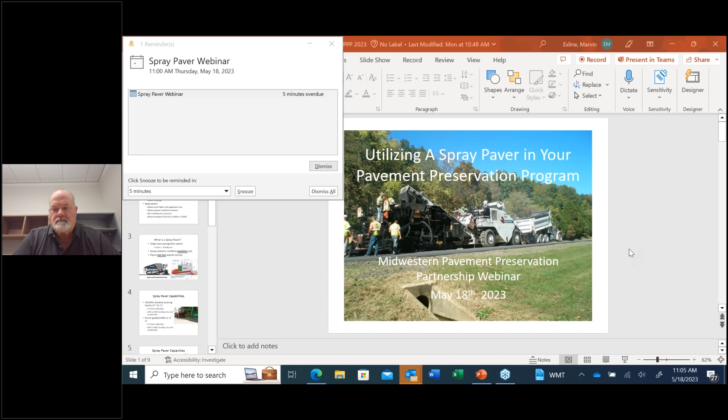Good morning, everyone. My name is Marvin Exline. I'm with the technical group for Asphalt Materials. In some of my previous companies, I dealt a lot with ultra-thin bonded wearing course going through spray pavers, and also with some dense graded hot mix going through spray pavers. So with that, I've got a few slides put together to give you a brief background on spray pavers.

The first question I thought would be of interest to everybody is, why do spray pavers exist in the first place? If you take a look at the traditional paving process using distributors for application of the tack coats, it really limits the rate of tack you can use because you're driving everything over the tack coat in the construction process. It also limits somewhat your tack selection, and it tends to favor harder base asphalt materials to reduce tracking issues, and it definitely does not favor polymer modified emulsions because of pickup and that type of thing.

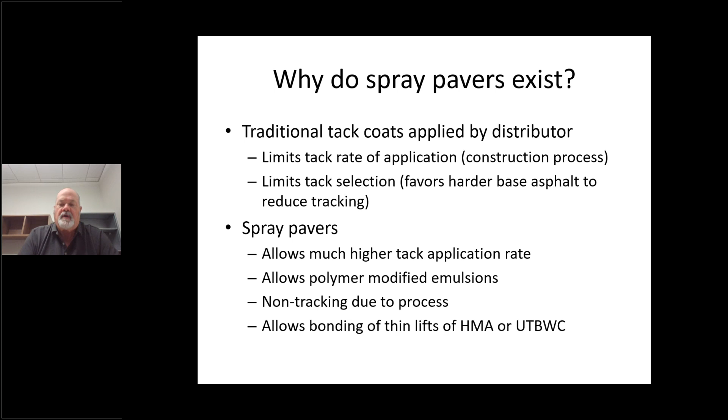The spray pavers, by contrast, allow these higher application rates of the tack. They will allow polymer modified emulsions. They're non-tracking due to the process, and they provide very good bonding for thin lifts of HMA or ultra-thin bonded wearing courses.

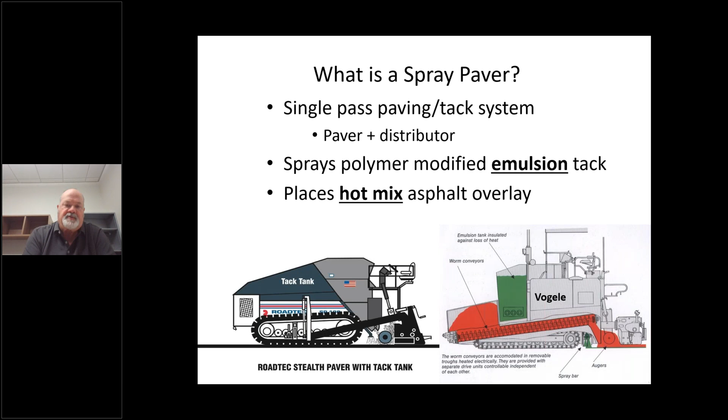So a little description here as far as what is a spray paver: basically a combination of a distributor and a paver in one machine. The equipment is able to spray the polymer modified emulsion immediately ahead of where the hot mix is being placed. In the diagrams below, you can see where the spray application is coming out, and within almost a few inches to a foot, you're seeing the hot mix being placed on top of it.

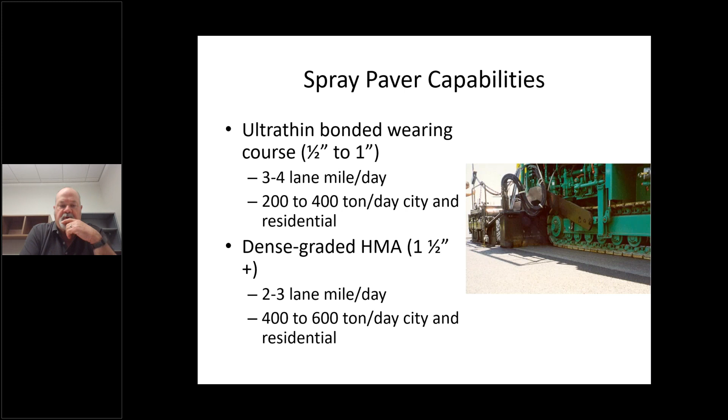The spray paver capabilities, like with ultra thin bonded wearing courses, which is typically less than an inch, you can typically pave 3 to 4 lane miles per day, and in city and residential, 200 to 400 tons per day. When you go to dense graded hot mix with thicker lifts, typically 1.5 inches plus, you can usually pave 2 to 3 miles per day and place 400 to 600 tons per day in city and residential applications. As far as capacities, I'll show 2 of the different spray pavers.

I believe there's at least one more in the marketplace now, but these are the ones I had info on. One is a RoadTec, and typically with a screed that can do 10 foot to 20 foot. It has an emulsion tank on board capable of holding about 2,100 gallons, and it requires the use of a material transfer device to feed the paver.

The Vogele is a spray jet paver. It can have a screed that's 8 to 16 foot or 10 to 20 foot. It has an insert that goes into the paver hopper that will increase the capacity of the emulsion storage to 1,800 gallons. It also has a 500 gallon on-deck tank that, when you take the insert out, will allow you to use trucks to load directly to the hopper and not have to use a material transfer device. Anytime you put the extra tank insert in the hopper, a material transfer device is the only way to feed it.

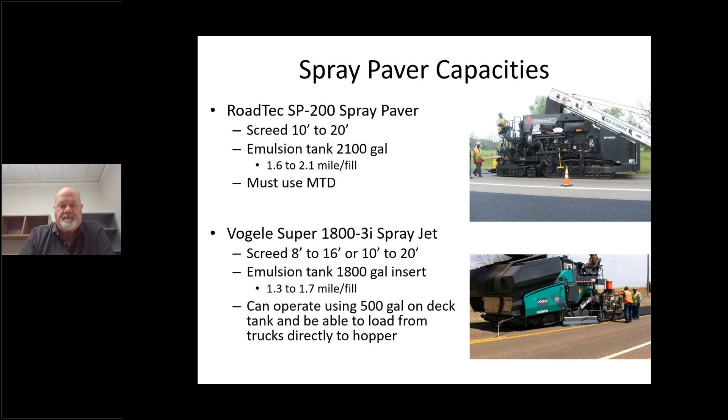As far as the spray paver material features, typically it's polymer modified emulsions going into the process, and those emulsions will typically have a spec maybe requiring 65% asphalt content, with an application rate typically 0.15 to 0.2 of a gallon per square yard. This is at least twice what normal tack rates are, and in some cases, like if you're using a dilute SS1H for your tack, this could be 4 times the amount of tack normally placed in normal construction.

The other thing about this, as you can see in the picture on the right, where the emulsion is being applied and the hot mix immediately behind it, there is absolutely no cure time before placement of the hot mix on the emulsion.

Another quick comment here is the types of emulsion. My original thoughts were that when you're placing hot mix on top of an emulsion, it's going to drive off all the water, and you can use any formulation and type of emulsion that you want. It turned out that you're driving off a high percentage of the moisture, but not necessarily all of it immediately. So if you use a slow setting or medium setting type of emulsion formulation, you could get leaching if you got caught in a heavy rainfall or near an urban area that has a sprinkler that comes on at 2 a.m. when you're doing your night paving. Trust me, we're speaking from experience on that one.

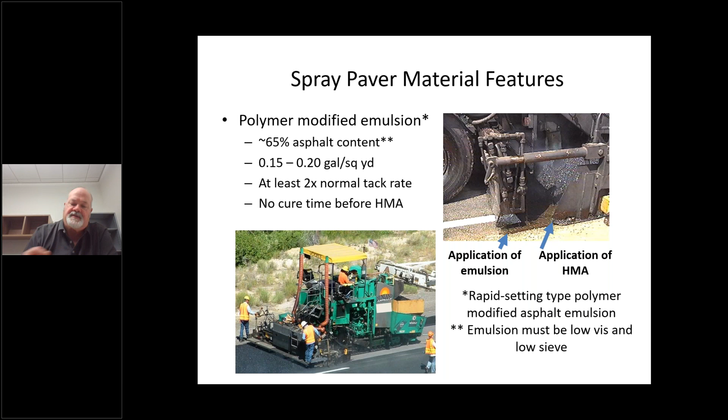Also, the emulsions that go through these spray pavers have to be low viscosity just because of the systems on the paver itself, and typically they need to be very low sieve emulsions. If you think about the nozzles on your typical distributor and how big they are, the nozzles on a spray paver are more like what you'd see on a garden sprayer, because you're traveling at such a slow rate of speed compared to a distributor. That makes the nozzle size very small, and that's the need for the low sieve content.

So that brings up the questions: I'm using 2 to 4 times more tack coat, why am I using so much tack coat, and why am I using a polymer modified tack coat? The response is that the thin lift is really where you have to get a very good bond to prevent delamination, so the higher tack rate can definitely help in that regard. We've also found over time, monitoring projects, that the higher tack rate can actually enhance the performance of the hot mix itself, because you're adding so much additional binder to it at the interface, and it appears to give you a benefit in both rutting and cracking.

The polymer modified emulsion, especially when you're doing thin lift and the ultra thin bonded type of process, helps resist over migration of the tack. That was one of the primary drivers back at the ultra thin bonded wearing course introduction - you didn't want the emulsion flushing to the surface. But there are other benefits that the polymer modified materials bring to the overall system, and again it will give you better properties as far as your end product HMA.

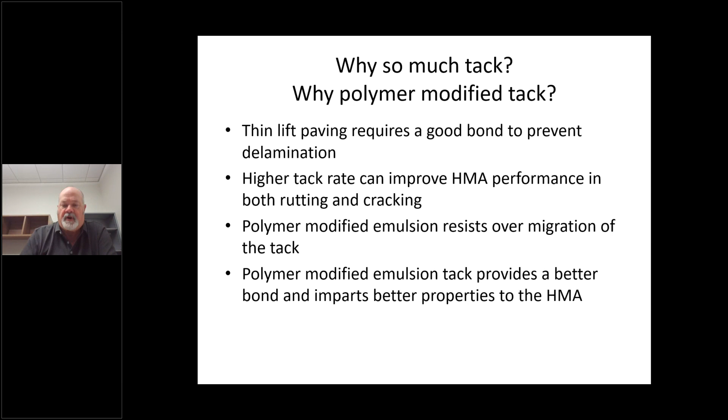As far as application features, when you're looking at thin lift, you have a fairly high rate of travel speed, 60 to 100 feet per minute, which is considerably faster than traditional paving. As you go to dense graded and placing thicker lifts, it slows the process down, but still relatively quick. It does give you a uniform application of tack, and there's never any construction traffic on the tack.

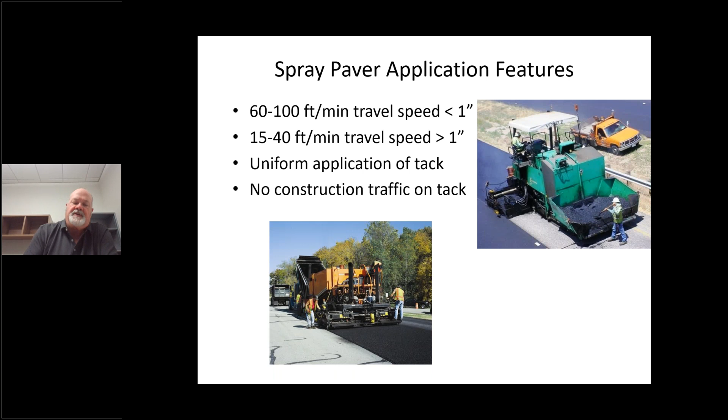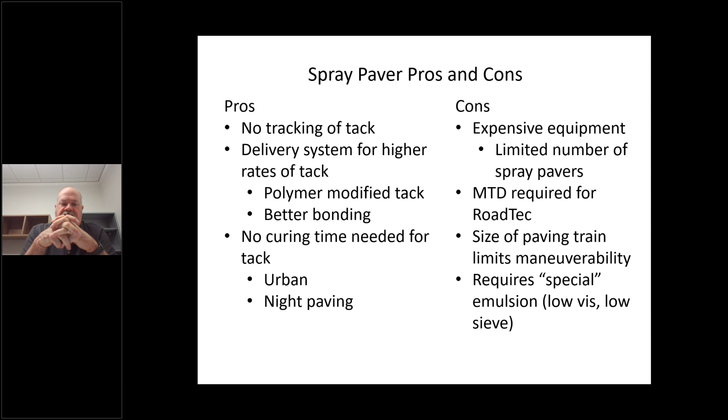That brings us to the pros and cons of spray pavers. On the pro side, there's never any tracking of tack. It's a delivery system for higher rates of tack, allowing polymer modified tack and the better bonding properties you get from the higher amount of tack. Another benefit is there's no curing time needed for the tack, because you're paving over it as it's almost being placed. So in urban situations where you don't want to have tack down a city street with cross traffic or pedestrian traffic, it's a benefit there.

Night paving is a benefit too, because if I'm using an emulsion tack in a normal paving operation, I'm typically trying to let it cure. So it's adding time before I can actually be placing mix on the pavement. So those are the benefits.

On the con side, the equipment is expensive, and there's a limited number of spray pavers, but there are various companies that will travel and subcontract to your local contractors for using a spray paver. Material transfer devices are required for the RoadTec, and they'll also be required for the Vogele if you're using the insert that has a higher capacity.

The other thing is when you have your MTD and your paver, which is of pretty good size, it limits the maneuverability. So it's not something that's that great in a subdivision, and it's not something you necessarily want to try to do in a cul-de-sac and that type of thing.

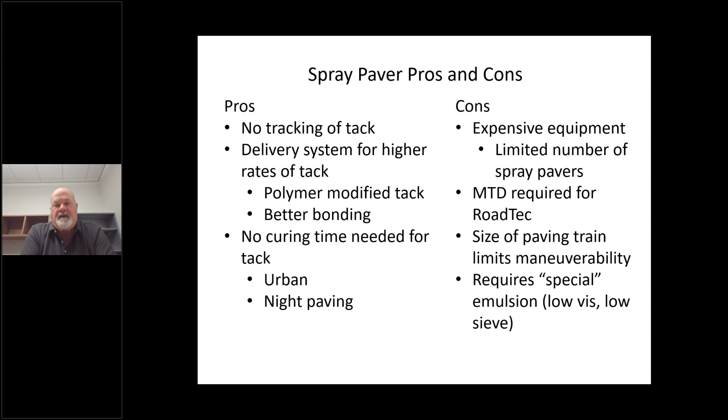It also requires what I'm calling a special emulsion, a little bit different than your typical emulsion, but similar to what you'd see on a polymer modified chip seal, only lower viscosity and lower sieve. So this is just one of the delivery systems that helps address tracking and pickup issues. There are other potential alternatives being looked at, like trackless systems, trackless emulsions, and various hot applied systems that are also being evaluated. I think that concludes me, and I'll hand it back over.

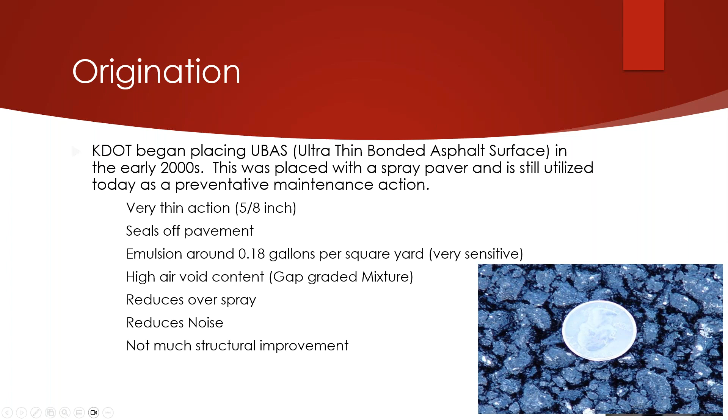The emulsion content that you shoot through that spray paver on a UBAS is about 0.18 gallons per square yard, and that's very sensitive, because if you don't shoot enough, it doesn't stick very well. If you shoot too much, it comes through the surface, and nobody likes to see the tack come through the surface of your mix.

Back when we started looking at doing spray pavers for dense graded mix, this was a challenge you'd see a lot, where the contractor did a great job of spraying a good tack coat on the roadway, and then the trucks start driving across it, and you lose a lot of the tack that you're paying for to bond that pavement to the existing roadway. You weren't getting the emulsion that you're paying for, so they thought, spray paver did a great job with UBAS, let's try that with overlays.

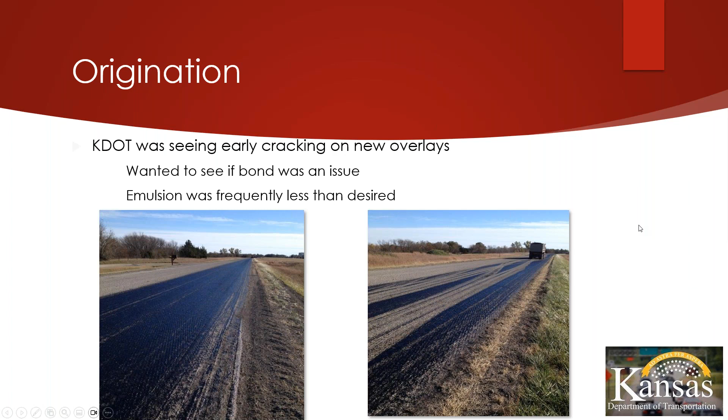So back around 2010, they specified that contractor place a dense graded mix with the spray paver. They used the same Vogele spray paver that they're using for the UBAS product. They did different shot rates to see what worked best for not only gluing or attaching to the roadway, but also to see if it could improve performance. And then they set up a bunch of test sections to monitor that performance over time.

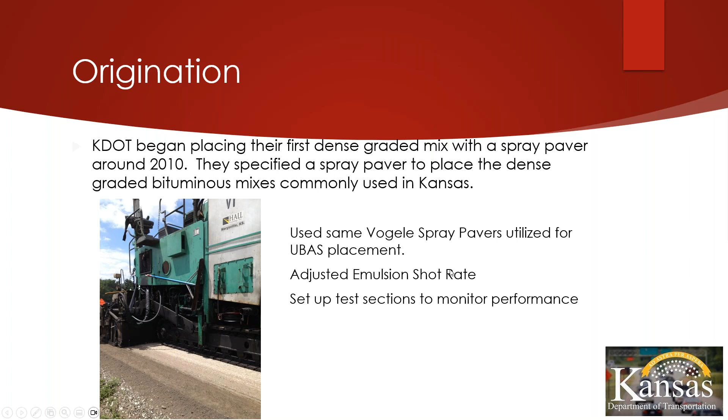KDOT has done a number of test sections throughout the state. They varied the emulsion shot rate from as low as 0.08 gallons per square yard up to 0.46 gallons per square yard. We found that the EBL shot rate was not as sensitive as it was for the ultra thin bonded asphalt surface, it never came to the top. We never had any rutting problems, even with that 0.46 shot rate.

These guys on the left are KDOT engineers and technicians who go out and walk these test sections every year. They write down and map out the longitudinal and transverse cracks on these sections, then look at it to see which is doing best.

What they've discovered is that 0.20 gallons per square yard did the best, especially for eliminating longitudinal cracks. Although as the shot rate went up it did help with transverse cracking some, it didn't make enough difference to continue shooting that high shot rate.

KDOT sets their test sections at 1,000 feet, and if you look on the right, they actually mark on the pavement. Here it shows a 0.228 gallons per square yard emulsion bonding liquid to the left, and the right is another shot rate. They pretty much change shot rates through the paver as they go, mark those, and then come out and monitor every year.

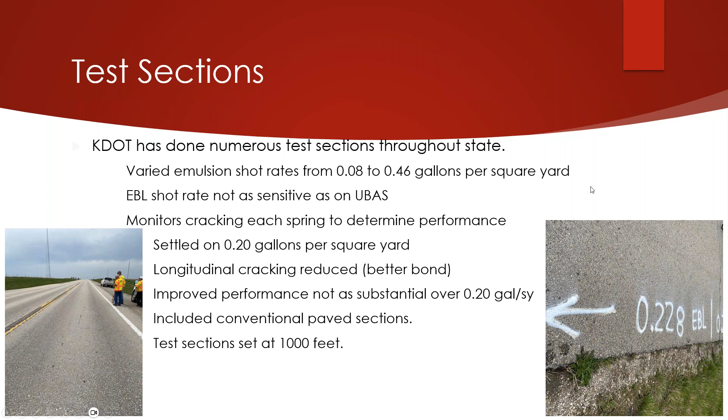When they go over ultra thin bonded asphalt surfaces, which have such an open grade, they use a higher shot rate for that. They shoot 0.3 gallons per square yard on that stuff, with the idea that they can fill up a lot of those voids on the surface and create a flexible membrane down in that UBAS to stop some of the cracking.

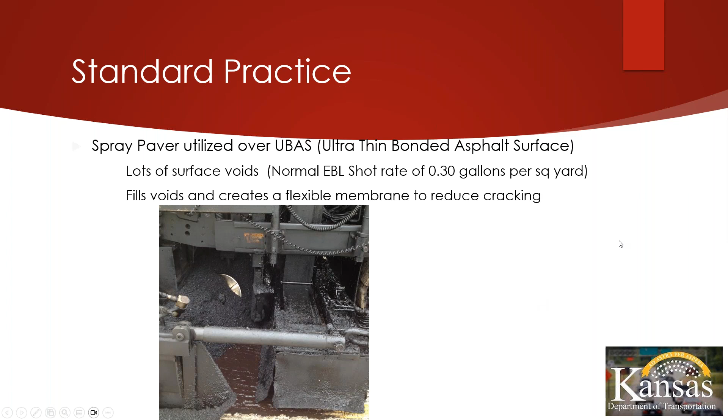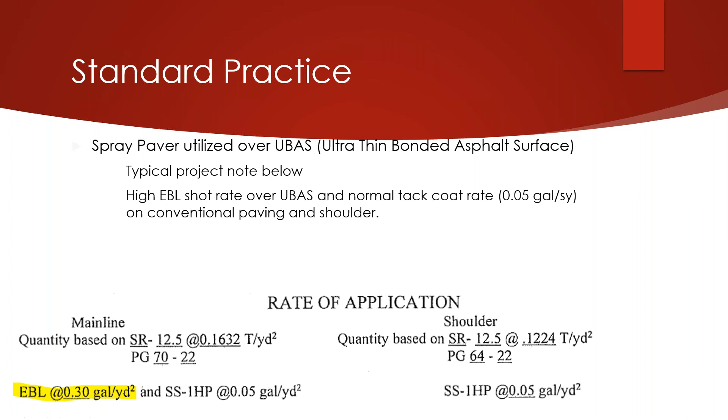This is a note I pulled out of a set of plans. On the left-hand side where it's highlighted, this is covering a UBAS, and it's got that EBL at 0.3 gallons per square yard. Right next to it, the SS1HP mix, for the hot mix they're placing on the shoulder and other places on the job without a spray paver, only had 0.05 gallons per square yard. So you see, like Marvin mentioned, the shot rate can be so much higher with a spray paver.

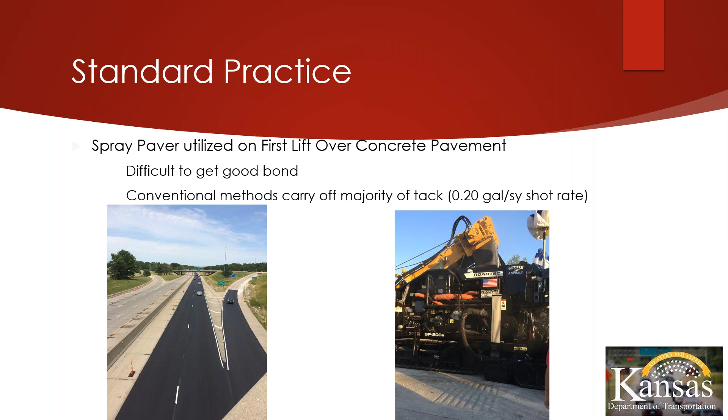Kansas also uses a spray paver every time they pave over concrete pavement. They found that concrete pavement has kind of a little scum to it, and if you spray your normal tack and drive over with trucks, pretty much all of it goes away. By using a spray paver, they can get the good bond they're looking for, and none of it gets hauled off by trucks and construction equipment, because it gets covered as soon as it's laid on the pavement.

The Kansas Turnpike uses a spray paver for all their work, asphalt, concrete, whatever, everything they do, because they were convinced that is the way to go on their projects.

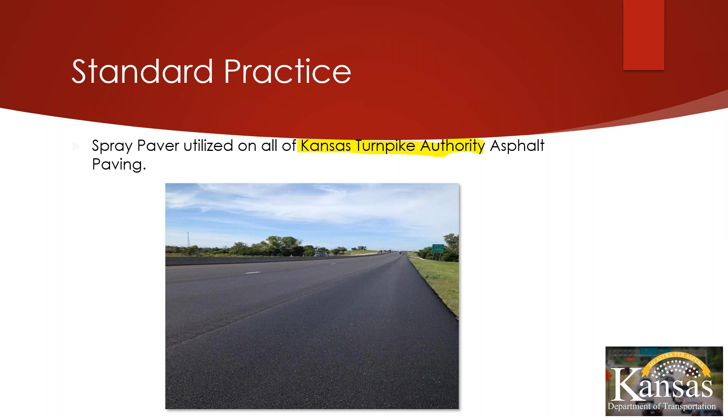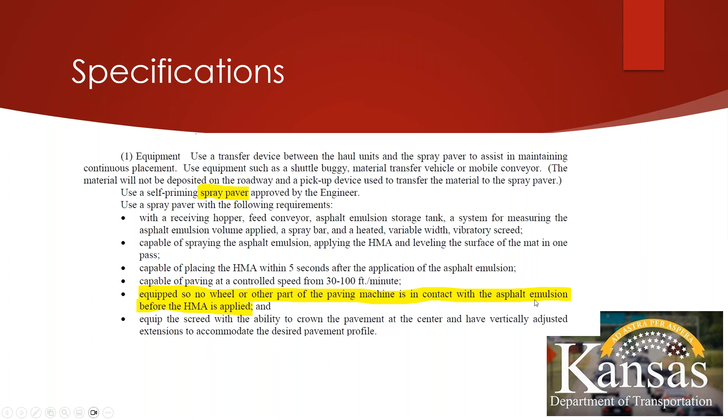This is a couple of specifications. I'm not going to read this all to you, but this is how we cover it in our specs. We tell the contractor he's got to use a spray paver, and then we tell him what the requirements are, that you can't have anything get in contact with the asphalt emulsion before the hot mix is applied. This is our normal spec for our EBL, our emulsion bonding liquid, which is our tack coat. It's real close to a CRS 2P rapid set cationic mix. We set the residue rate at 63, and just like Marvin said, the key here is to make sure that stuff can go through the nozzles and get through the paver.

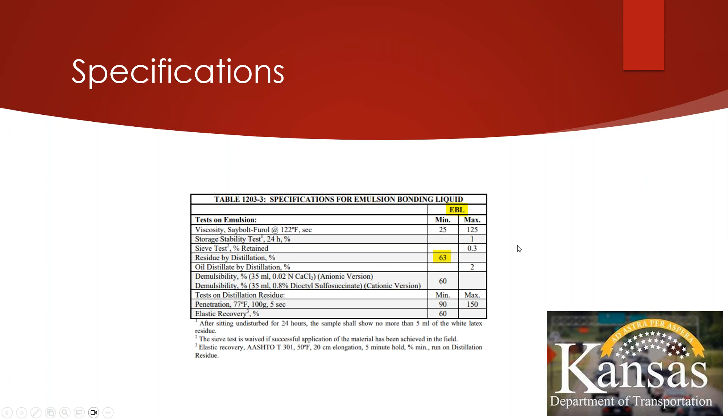That's all I got from Kansas. I will turn it back.

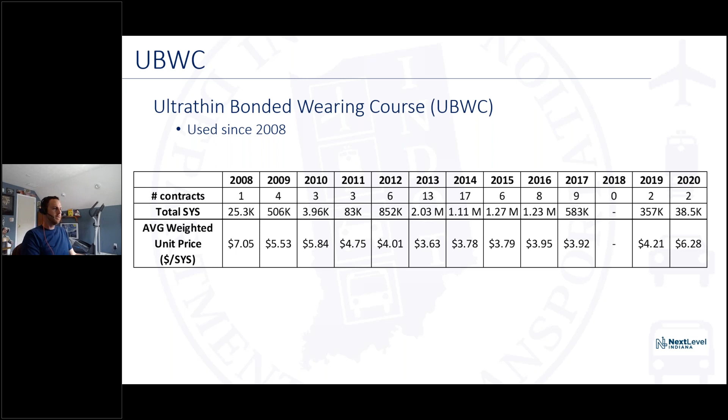The contract was let, the machines came out, everything was done at night, and it was all done within a couple of days - I think it was less than two weeks from start to finish - and the public was really happy with it. So the public just sees that it's a brand new roadway. They don't realize it's a completely different type of treatment.

Here's another example, again a 4-lane divided highway, about 20,000 AADT. This one was paved in 2019. Again, just showing what it looks like after a few years.

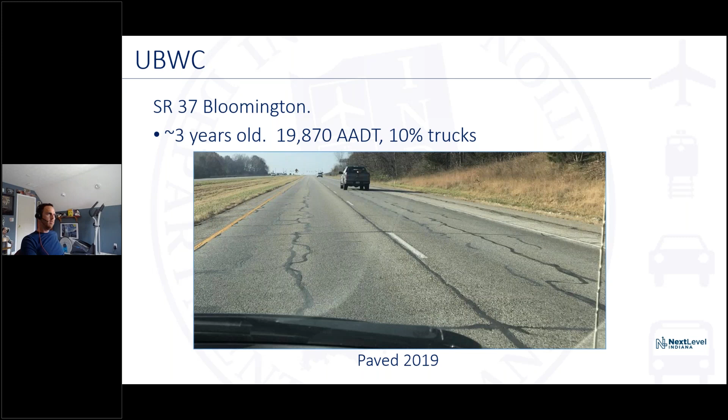So like I said, the other application we began using the spray paver with is dense graded HMA. We have been talking with industry for quite a few years. We as a department had interest in using this. We knew some other states were doing this, and it really was a, you know, what comes first, the chicken or the egg type of thing. It was hard for us to specify a project when nobody had a spray paver, and nobody wanted to buy a spray paver because there were no projects.

Here's a quick breakdown of our history. So in 2017 was the pilot projects, and I believe those were subcontracted out. Our main prime contractors had to subcontract that out because nobody owned the machine. But that got the process started, got everybody maybe a little bit more familiar with the technology. Everybody started asking the right questions. And so we progressively grew that over the years.

What I did want to point out is I don't exactly have the added cost for what that spray paver adds to a contract, because there's not a specific spray paver item - it's hidden in some various pay items. But the guidance I've been giving designers is it adds about a 3% increase to the contract, just concerning the milling and resurfacing operations.

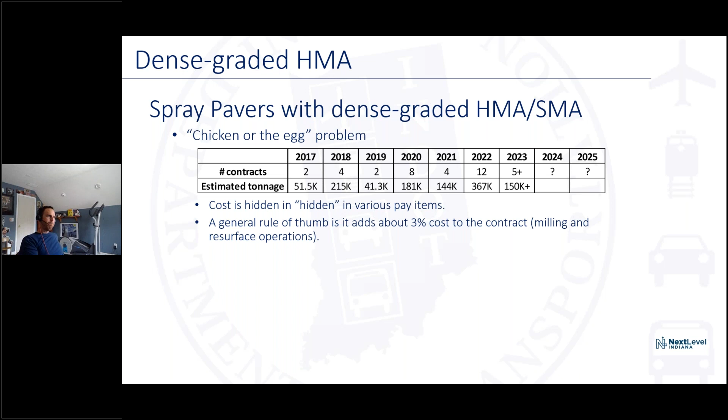So like I said, 2018 was - we had a couple pilot projects in 2017. 2018 is when, as we kind of guaranteed that more projects were coming, the first contractor actually bought a machine. They decided to go with the CAT retrofit option, which seems to be working out fairly well.

So maybe surprisingly is not the right word, but by the end of 2022, 4 of our major contractors owned a spray paver.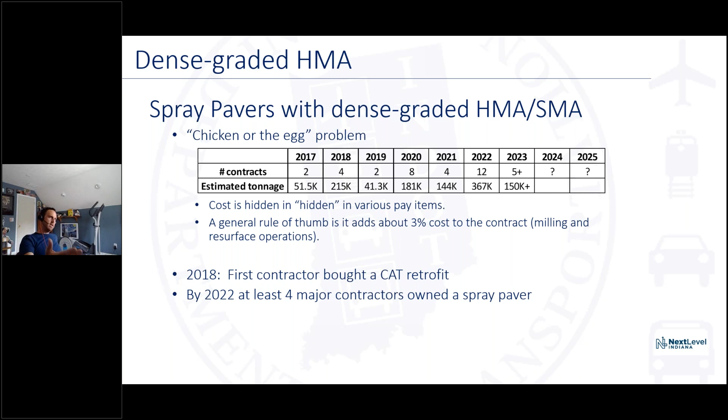As far as, if you'll notice, I have there in 2023 the plus signs, and then in 2024 and 25 I have question marks, and the reason for that is up until now it really took me or a colleague babysitting this initiative and manually inserting these specs into contracts. What we did is we finally locked down a basis for use. So in Indiana, we are targeting our high value, high profile roadways to use the spray paver on, because there is added cost. So what we're looking for is really our interstate type projects, HMA or SMA.

They can be used for night work, as has been discussed, or concrete overlays. But what we did is put that basis for use in our design manual, so these projects start happening automatically, and I can get out of the babysitting job, which I'm more than happy to get out of.

I'm not going to get too much into the weeds on the specs, but these RSPs I've listed here are how we insert them into the various contracts when needed. You can Google those or search for them if you like.

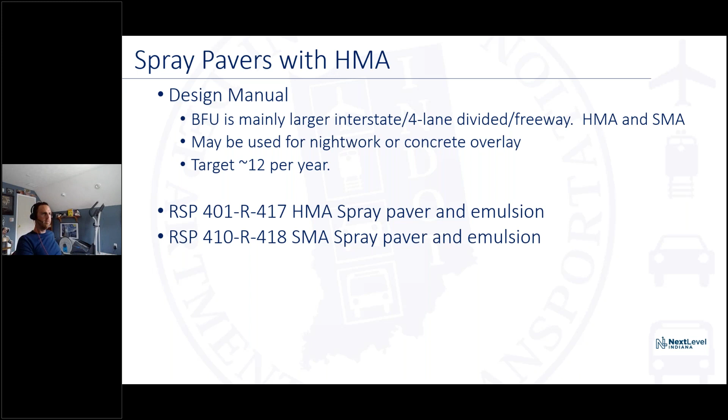So again, this is our typical application rate with dense graded HMA. It looks very similar to the UBWC one I showed earlier, except we also added 19 millimeter and 25 millimeter. We use it for all lifts in the project, again with some tweaks based on what you're paving on top of.

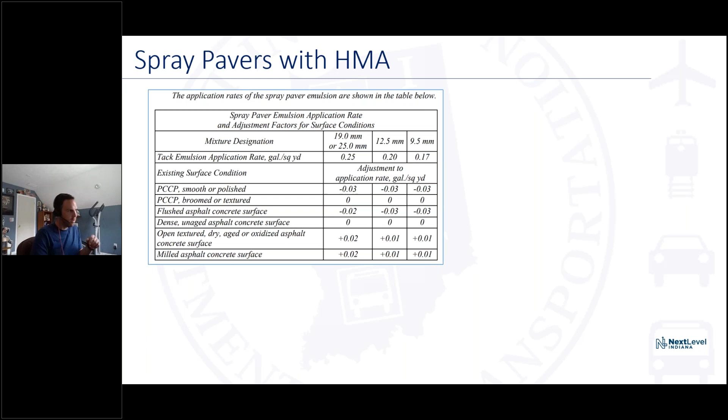And here's the emulsion we use. It's the exact same emulsion we use for UBWC that we specify, and this looks really similar to what Kansas just showed. So there it is, for those who are wondering.

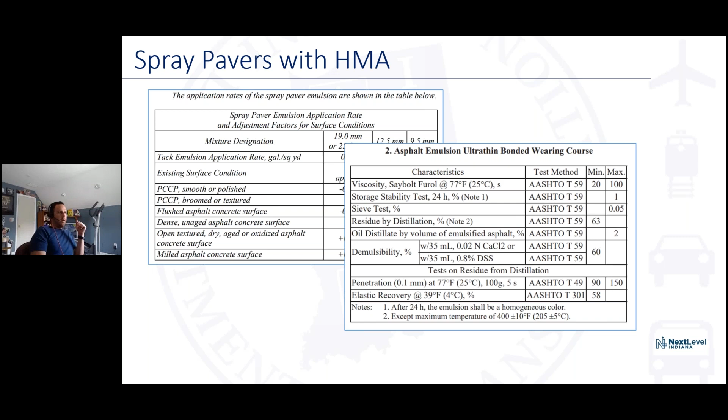I did want to briefly talk about issues or lessons learned when we started dense graded HMA and spray pavers. One of the first things: in our first contracts, we just swapped out the tack coat item for the spray paver emulsion item.

What we didn't realize is that spray pavers cannot be used on every part of a contract. There are areas where it just can't fit in, areas where you have to use a widener or other equipment. So it's important to separate conventional tack coat and spray paver emulsion in the contract and have both as pay items.

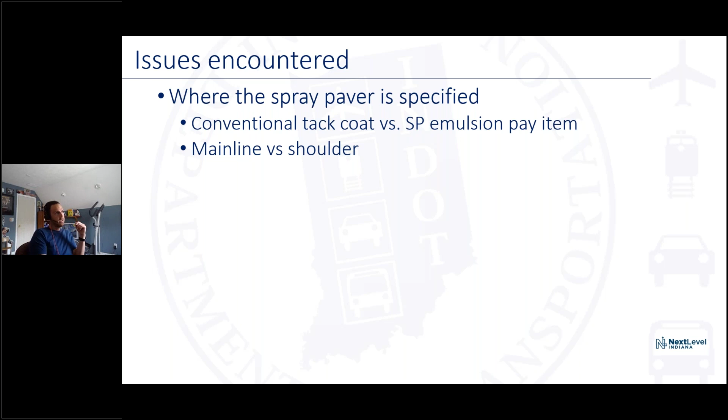And similar to that discussion, what we learned is we don't necessarily want to use the spray paver everywhere, even on a targeted project, in areas where it doesn't make sense. One thing we learned is we don't really want to specify spray paver on shoulders. Why use that premium product on shoulders?

Again, I don't want to get into the weeds on specs, I just wanted to show how we take care of it. That second paragraph is the main crux: mixture placed on all travel lanes, turn lanes, auxiliary lanes, and ramps which are 11 feet or more in width is where spray pavers are going to be used.

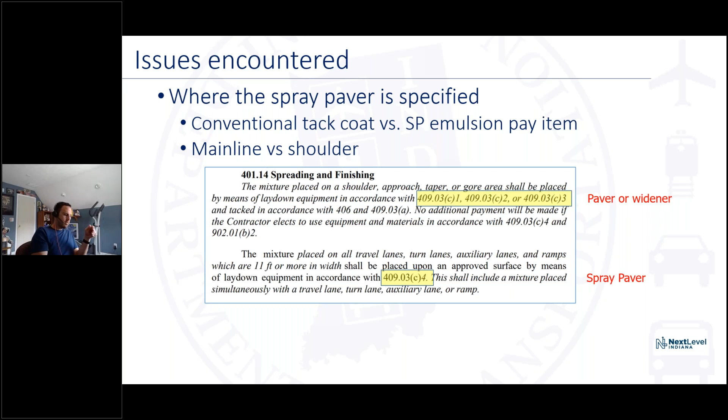So anybody bidding on the contract knows exactly which tonnage, which lane the spray paver is going to be used on, and the like. Then one other issue we learned along the way: in Indiana, we do plate samples behind the paver for testing. Initially, you can't put the plates down ahead of the spray paver and just pave over them, because the emulsion would also be on those plates, which would affect the results.

So what we initially came up with was: there's going to be a plate sample in this area, say about a 100-foot area, so the contractor would pre-tack this area with conventional tack, we'd put the plates down, and then pave over it with the spray paver with the spray bar turned off.

That sounds good in practice, but in reality it's a logistical nightmare to coordinate. You're having the tack coat distributor sitting there not being used all day. One guy's either having to sit in that truck or get out and run to it and bring it back. It was a nightmare. And by the time construction traffic, the MTV, and the paver got to the plate sampling area, all that stuff was tracked and gone anyway.

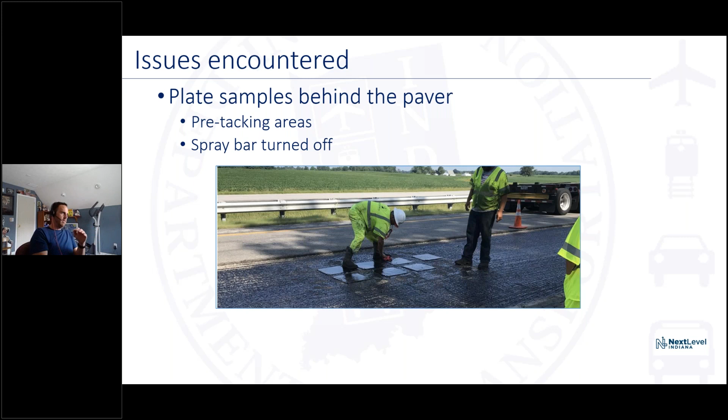So I made an off-the-hip decision one day to just allow, in the plate sampling area only, the spray bar to be turned off, with tack coat not required in that area. It's not the most popular idea, but it was the simplest, quickest way to get this initiative going with no complications. That's still one area we're looking to improve—how we can make plate sampling and the spray paver work together for the best end product.

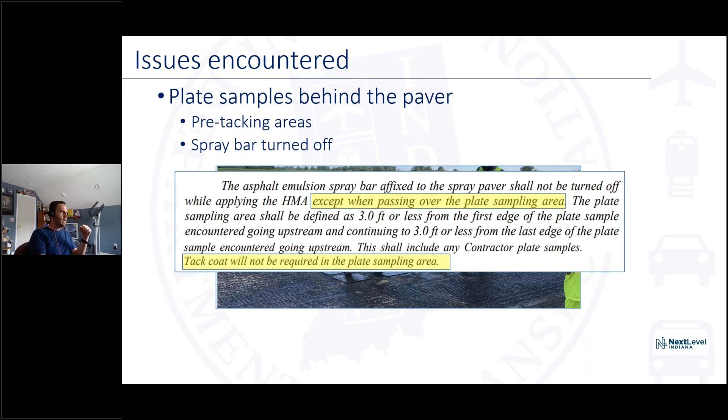So that's really all I had, and I guess I will turn it back over.

We appreciate your insight there, Nathan. As it pertains to the contracts, that's something we've experienced ourselves here in Michigan, to where, I mean, a lot of this, especially the open graded aspect, was originally the old Nova chip, right? When it first came on board there was high use of it, then it started to taper off. We're in the same boat as Indiana, looking for opportunities to bring this fix back into play, but same obstacle of lack of contractors. So yeah, we're still learning, trying to figure out the best way to move forward.

All right, one last presentation before we get to a lot of good questions that are coming in, which is great, and we'll get to those shortly. Our last presenter is Mitch Husky from the Missouri DOT. Mitch, take it away, sir.

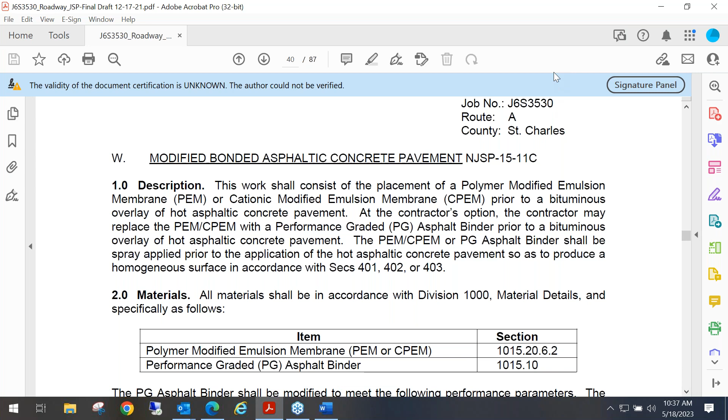Okay. Hope everybody can see my screen. I'm with the Missouri Department of Transportation. We've got quite a bit of experience with spray pavers. We started back, like you mentioned, with NovaChip. We went to UBOS and put together a little tweak to the spec for our needs.

What I have here on the screen for y'all is our spray paver spec, primarily targeting dense graded mixes. We've had a lot of success with UBOS over the years. We've used them as a preventative maintenance treatment on a lot of our interstates to prevent the full depth asphalt repairs we'd eventually have to do. We started with dense graded mixes back in 2007.

We experimented with it on one of our lettered routes, Highway T, with a contractor. We've been pretty blessed — we have a lot of contractors across the state with spray pavers, so we didn't have issues finding somebody to run a dense graded mix through a spray paver. Highway T was our first experiment with dense graded mix. We placed our low type mixes, our BP1s, bit bases, non-super pave mixes, through it. We did several test areas and played around with application rates from about 0.15 all the way up to 0.28. We had some success with that, and from there we started looking at some of our super pave mixes for dense graded applications.

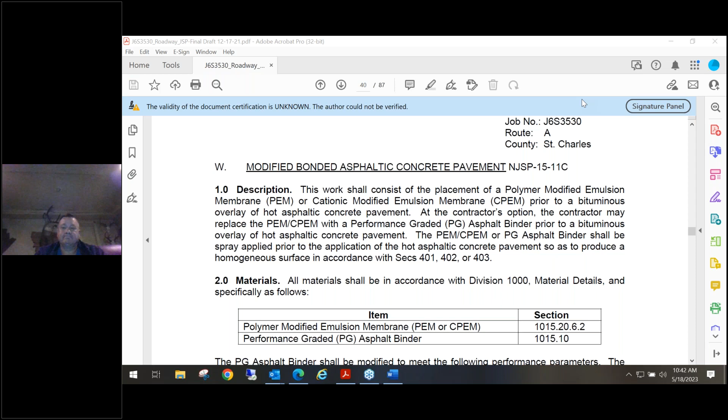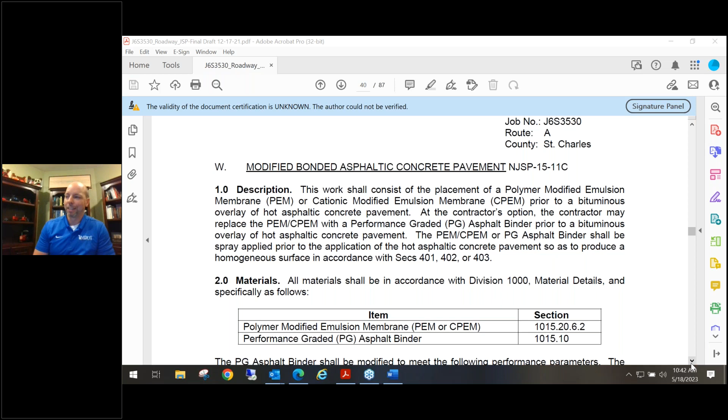All right, well thank you for sharing the Missouri perspective, and thank you to all panelists for sharing your presentations. Now we've entered the open panel discussion, where I'll go through — and like I said, we've got a fair number of questions, some directed specifically to certain agencies, while others are more generic and all of you are welcome to weigh in on. So one of our first questions is, what is the process for installing and removing tack tank inserts?

Can it be done on the fly? Marvin, I think this one might be geared more towards you, sir. I don't believe that would be an on-the-fly type operation. It would require some time, and the contractor would have to schedule that to get it swapped.

Are you familiar at all with the Integral DX system? I know they sell themselves as more of a quote unquote on the fly system that you can attach to a traditional paver. Are you familiar with that one at all? I am not.

Rob, I got a little background with that. I think that's kind of your cat retrofit. So what those guys do is put in a tank and add some spray bars and stuff to a cat paver, and I think it's up in Minnesota, but I'm not positive. There's a number of pavers out there now that are those cat retrofits, and I think that's the process you're talking about.

We did have one contractor here in Michigan in our Upper Peninsula make the investment in that, and any of the projects that are up that way, at least 50% of the time, they are using that machine as of right now. I can't say that we've noticed any performance difference between a purpose-built spray paver and one of those add-ons. But we're continuing to track them.